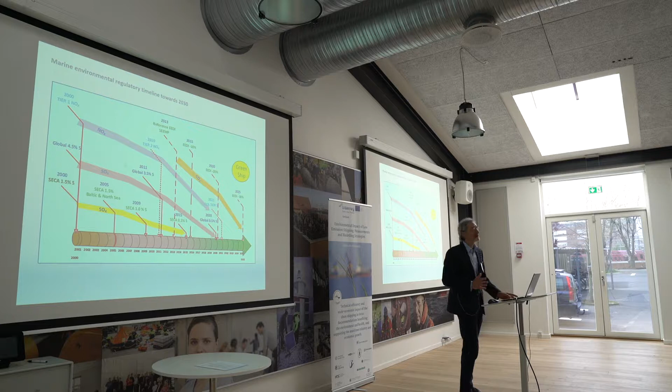And starting from this timeline of the environmental regulation, as everybody in this room probably knows, several programs started two decades ago, and now we are more or less coming to the end, and these programs are different. Each program is generally focused on a different gas component of the exhaust gases. And of course, these specific aspects of the programs affect not only the money which is going to be invested for such purposes, but also the ships themselves.

And now we are at quite an important point. Here we are close to the new regulations. Everybody knows about the sulfur cap, but in the shadow, we also have the next phase of the EEDI, which was already mentioned by Juka in the first presentation. And finally, we also have in 2021 the Tier 3 program for nitrogen oxides compliance.

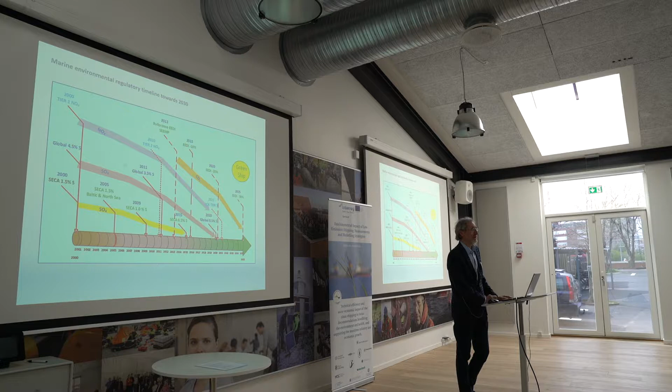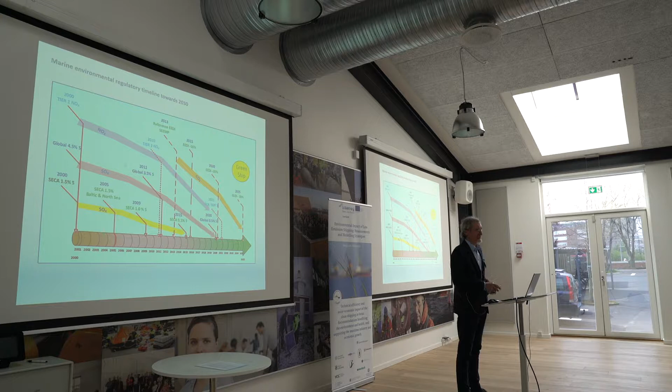Fortunately, this program regarding nitrogen oxides will be valid only for new buildings, not for all ships. And also, the CO2 programs will be generally focused on new buildings. And if we try to summarize what kind of possibilities we have to be compliant with the ECA regulations, generally, as in the title of my presentation, we divided this approach for emission control in two ways.

One is the primary, very simple one. You can remove the sulfur from the fuel and use low sulfur fuels as the primary source of energy. And the second one is more complicated, more costly for the engines. These are the scrubbers. The name scrubber unfortunately doesn't give the full picture of the system. Generally, the proper name is exhaust gas cleaning system, which will also be used later in my presentation.

That is the part which is quite important, and we know that we have different scrubbers, and not all of them are in use. For example, dry scrubbers haven't succeeded so far. We are waiting. The scientists and researchers are still trying to find the proper solution regarding this dry system.

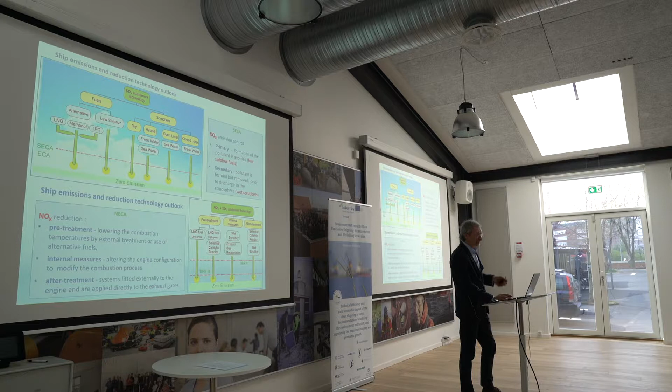Regarding the exhaust gas cleaning system, IMO predicted in 2016, in the data and estimation published in the reports, that in 2019, exactly this year, the number of scrubbers fitted on board ships would be 7% of this figure, 24,000 ships. Apparently, we found that at the moment nearly half of the ships are equipped with scrubbers, including the new buildings contracted for this year.

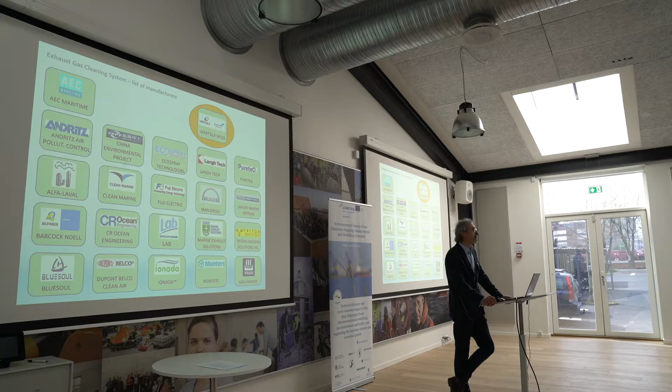So far there are more than 40 such system makers. There is not even enough space here to list all these scrubber makers. We also know that many scrubber makers have not been able to install any scrubber on board a ship. And we know that Wärtsilä is at the moment the primary and most important scrubber provider, and their system is one of the best at the moment. I'm not talking about the prices, I'm only trying to assess the technical matters

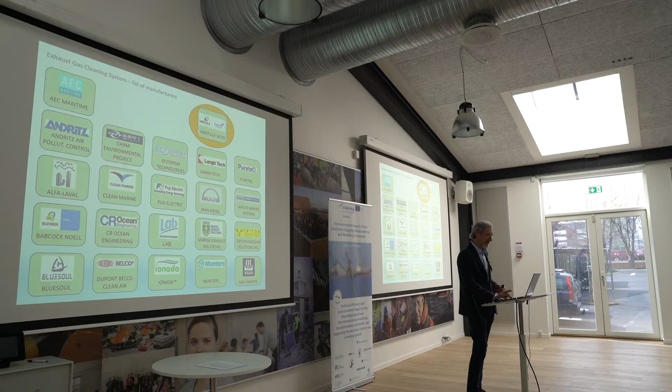related to such a system. The requirements for the scrubbers are quite simple, because one relates to the exhaust gas and the other to the wash water. But regarding the wash water, we have to be sure that we are talking about the wash water coming out from the scrubber. It depends on the mode of operation.

Generally, as Johan told us, there is this relation as a concentration of two components, sulfur dioxide and the CO2 percentage concentration. This is flexible and dependent on the value of the equivalent sulfur content in the fuel. That means if we need to be compliant with the new limit, this value will be bigger than we have listed here.

The other area is more important, I think, because it gives us certainty about what kind of water is coming out from the scrubber. So far we know that ship owners have generally opted for the open loop scrubber, which means all the water inside the scrubber comes out from the scrubber. Even if a certain amount of the water is cleaned, it is certainly not even 90%. Usually only a few percent of the water is cleaned.

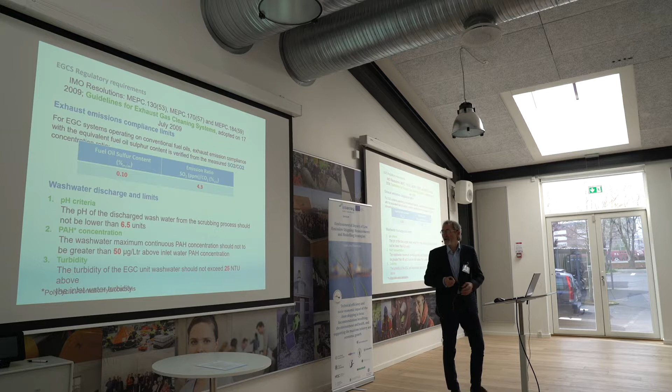Finally, there are two ways of approval for such a system, and there is a big difference between the two schemes. So far, we know that mostly the scrubber makers have used scheme B. The differences between the two schemes are quite important. In scheme A, it is necessary to build the system in the factory, provide all the necessary certification checks and certification run, and later install the system on board the ship and do this procedure once again.

The other one, much easier to do and already in use, is the scheme where only the monitoring system is tested and certified. The approval is generally given for the whole system, but only the monitoring system is certified. Why are such approval differences important? Because later on, if we have a system on board the ship which was not tested before, we could expect some problems.

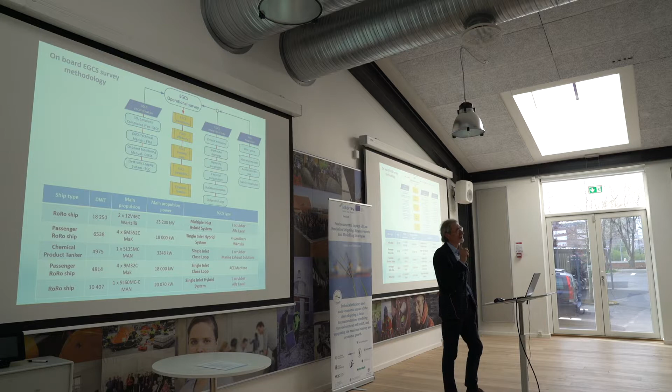And we focused on the most important issues like efficiency of the scrubber, which is of course quite important. Later on, we recognized also a very important issue like the consumption of the energy, which in contrary will increase the efficiency of the ships if we are talking about the operational indicator, not the design index, but the operational indicator, which is already also included in this convention.

And finally, we also tried to assess what is the necessity to use sodium hydroxide for the treatment if the ship is running in the closed-loop system. And not to mention the sludge discharge. All these components are very important because they create the additional cost which is necessary to provide for service of such a system on board the ship.

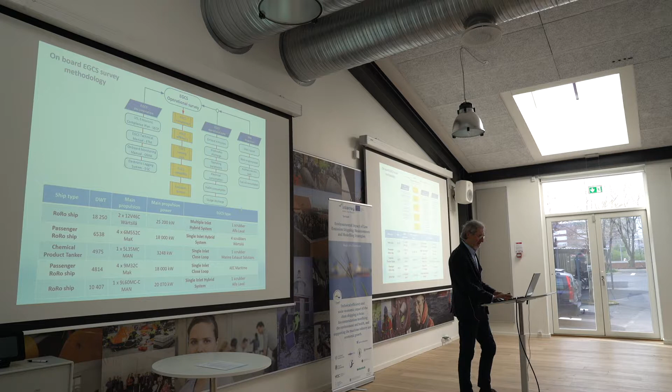And we know that during the ship operation, there are different modes of ship operation. And generally, we focused on ships primarily running at full load. And even if we have a hybrid scrubber, the ship owners use the open loop mode as much as possible; they only change the mode of operation when they come to the port.

There are even some ship operators who have a list of the countries where open loop operation is allowed inside the port. Maybe nobody can easily recognize that in some countries, mostly in Europe, the scrubber is allowed as an active system in port operation. There are two countries in Europe, probably Belgium and Germany, where the scrubber is not allowed. And I know from the ship they have in the engine room the list of the countries where they can change the operation of the scrubber before entering into the port.

And as you can see, we found the ships, so-called frequent flyers, between two ports, and they switch the scrubber from one mode to another one, and that is the relation where they use the different modes of operation. And we found generally the scrubber efficiency quite reasonable regarding the labels.

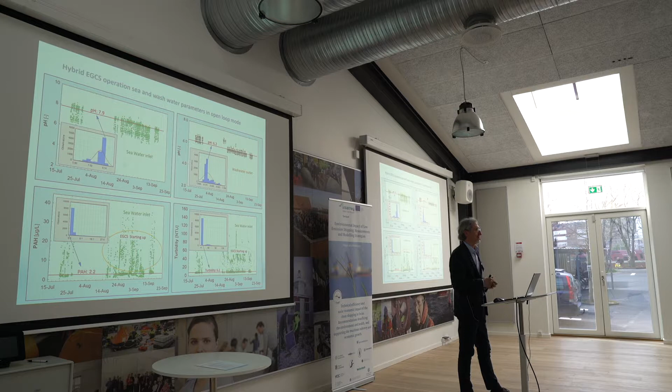For that purpose, I have marked the places where the scrubber was started, and even though it is difficult to believe, we have some disturbances on the inlet water, which means the system is very sensitive for this kind of measurement, and it shows instability. But anyhow, generally, all the parameters are okay, because I am showing you parameters which generally do not exist in the log created for such a system for the inspections. And finally, a very important issue, that is energy consumption.

Generally, you probably know that engine makers and system makers distribute information that the energy consumption is more or less 2% of the maximum nominal power of the main engine, or the engines used for the scrubber design.

And we found quite different figures, but our approach is more accurate. On board we recognize each piece of equipment. For example, the equipment shown here, and we exactly tested what is the working consumption in working conditions. Not always is this value strongly related to the engine load, because it's a quite different system, generally driven by electrical motors, which include all these variables related rather to the pumps, the ventilators, or other systems driven by these electrical motors.

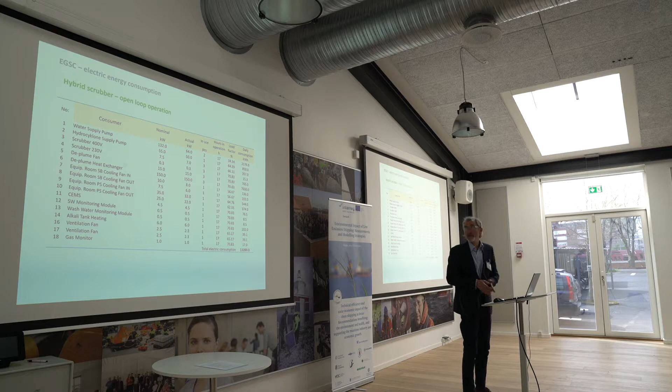Which means our approach is a bit different, because we are trying to assess the electrical load regarding the service load of the engine. These figures shown here are made for this specific ship, when this hybrid scrubber was operated in open loop mode. The same scrubber gives quite different figures if closed loop operation was used.

Basically, not only due to differences in the parts which we have on the list, but generally by the operational period. That explains why we have the different values.

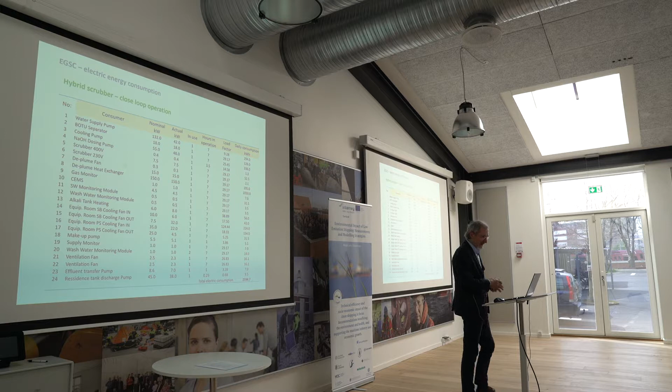One more example, from a different ship, where we tested the relation between the engine load and the consumption of the scrubber system. We found that for such a system there is no difference - you see we've got all the values which are generally the same. It doesn't matter if the engine load was very high or very low at the moment.

What is important - just take a look - the scrubber system gives quite an important increase of the load if we look at what is actually produced for this load. This is more or less nearly 30% of the total load in the electrical net for such a system in operation. And also important, this was the ship where we had closed loop operation all the time.

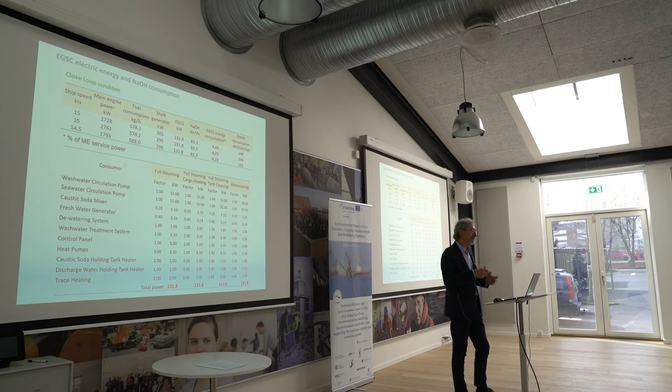There are some ships like this, where just take a look how incredibly high the consumption of the sodium hydroxide solution is. That gives you the impression of how important, and how high the cost, for such a seemingly simple operation could be.

Finally, I will change our attention to another solution, the LNG. For that purpose, we also recognized the amount of ships currently fueled by this kind of fuel.

But anyhow, we see the main problems for LNG as a main source of energy: two issues. One is, of course, the engine itself, and the other is gas storage. That is at the moment the biggest obstacle that we can recognize for such vessels.

Going to the ship design and ship concepts, we have, in contrast to diesel engines, quite different engines as potentially can be used on board ships.

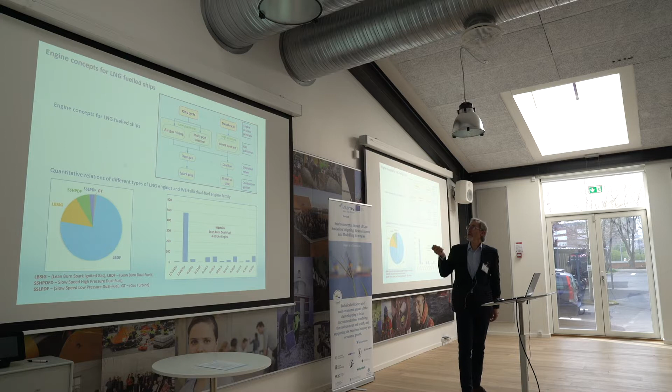Just take a look. If we look at the principle of operation, then we have two kinds of engine. One working more or less similarly to the diesel process, the diesel operation, and another that is the Otto cycle, more related to the engines we have in our cars, where we have combustion initiated by a spark plug. That is more or less the same.

But there are also other differences which are more important regarding the drawbacks already known and already mentioned - the so-called methane slip - which I'm going to show you later in the measurement results.

We also have quite different systems for gas admission to the cylinder. Only one engine maker has decided to choose, I think, the most sophisticated system, the MAN system, where they inject the gas exactly like conventional fuel directly into the combustion chamber.

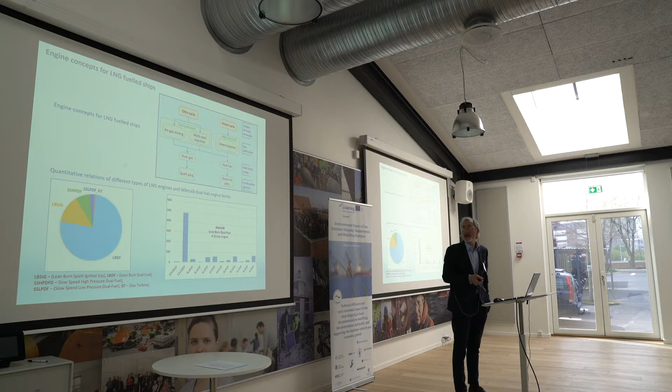The other ones use only a mixture which is prepared at the inlet to the engine - that is the air-gas mixing system. And the other one, very common, I think at the moment the most popular, is where we have multiple port injections to the inlet channel of the engine.

Finally, you can say we have two options: dual fuel engines, where we can use even heavy fuel oil or diesel oil instead of the LNG, and of course the LNG itself. And finally, we also have only the LNG engines. All kinds of these engines now we can meet on board the ship.

But just take a look. We generally have one engine maker, that is Wärtsilä. This engine maker provides, I would say, 90% of the engines which we have on board the ship, and specifically one family is very popular. Just take a look, this engine is mostly on these LNG carriers, and for that purpose we have chosen these engines for the survey as well.

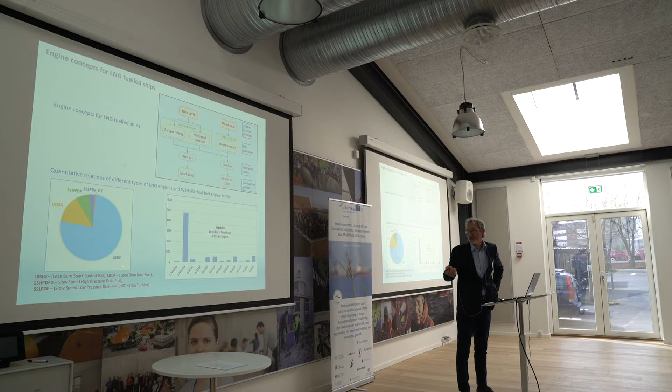As you see, there is the engine developed with this abbreviation - that is the Wärtsilä dual fuel engines. And it is quite important to understand what this lean operation means. I will give you some explanation.

Generally, most engines are operated very close to the stoichiometric ratio between air and fuel, close to 1. Our car engines, for example, are slightly even below 1. Generally all the engines we have on board as conventional engines operate with a ratio close to 1.2, but the Wärtsilä dual fuel engines are close to 2, exactly 1.95 - that is exactly the range designed for this kind of engine.

As an effect, we get very low concentration of nitrogen oxide, and of course the efficiency of the engine is very high. But the operation is very limited due to two negative aspects of this operation.

One is misfiring, and it happens very frequently - then the engine has to be stopped immediately by the safety system. And another one, which is more important, is detonation, also known as knocking.

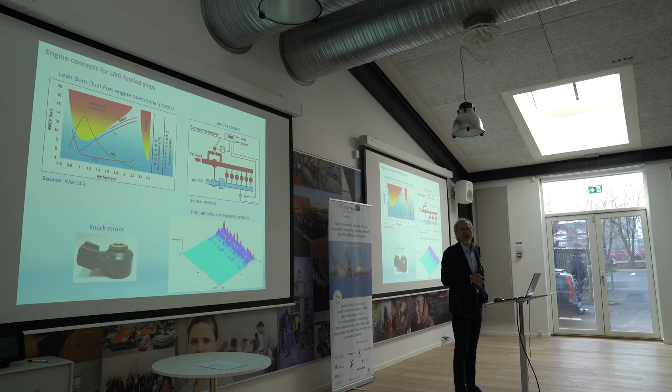...are equal to the knock process, which sometimes happens for a very short period, but is quite important to recognize. For that purpose, Wärtsilä has equipped its engine with this knock sensor to provide proper and safe operation of the engine during normal service.

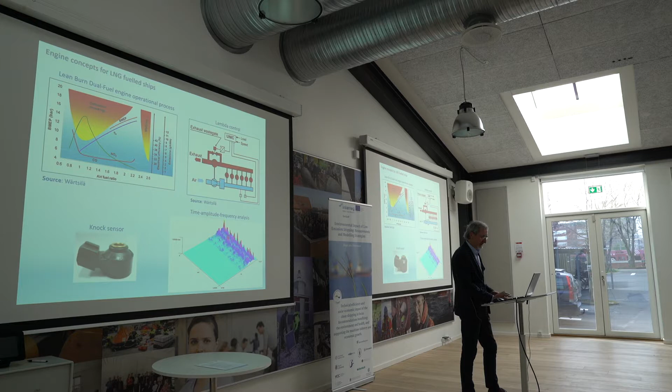Oops, something went wrong, I'm sorry. That was not my intention. I'm sorry, that is a mistake. I don't know why - probably it was something with this version of the presentation which I sent, because my intention was to show you a quite important issue.

That is quite important. Also, in the case of LNG as a fuel, we can suspect that some of the fuel gets out if it's unburned, which means that will increase the methane slip, which we already have as a normal negative side effect.

We were trying to find out the reason why, in service, we always have higher values of fuel consumption against the consumption that was stated during the test cycle in the factory. There shouldn't generally be any difference.

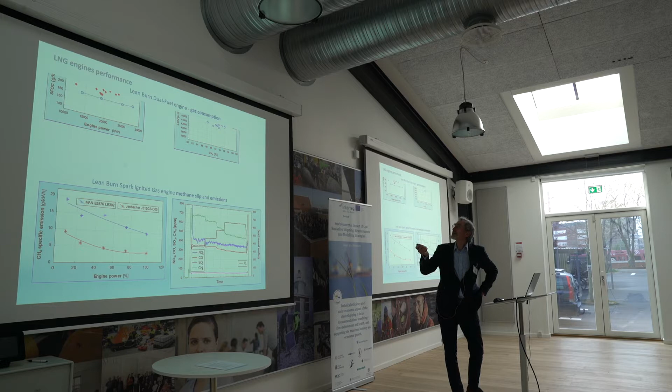Later on the other one will follow. So finally, that was the intention I have put here. The calorific value will change also according to the composition changes which we have in our fuel, and this trend was given in this diagram. I'm sorry, I can't show you more detail, but anyhow, everything will be in our report submitted to the website.

Of the project. And finally, regarding this methane slip, basically I can tell that no engine maker was excited if we tried to inform him that we are going to check the methane slip. And finally, we didn't get the permission from the main engine makers, so we have chosen some engines and we measured this methane slip. And just take a look what a terrible value we've got.

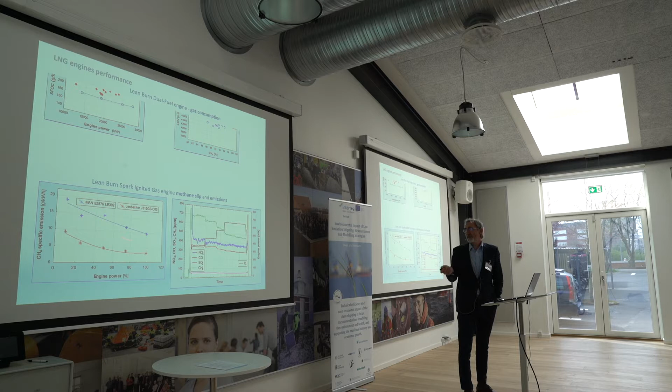And there is the exemplary concentration measurement which was done on this kind of engine. And just take a look, the nitrogen oxide emission, because these are lean burn engines, is really very low. Yes, that should be stated quite clearly. But anyhow, much higher concentration of methane we found.

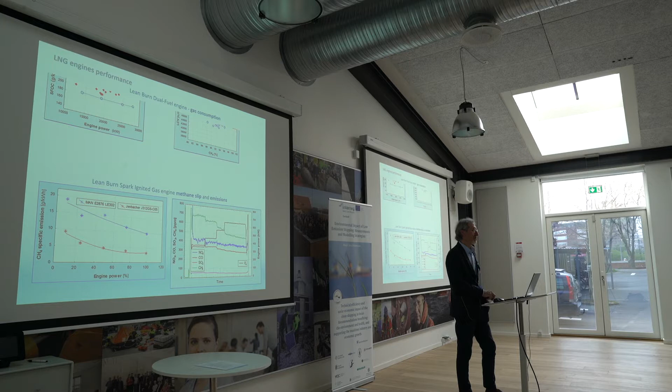Then later on, when we calculated these emissions to the methane slip, we've got this diagram for this engine which we have. Yes, it shows that it should be our concern at the moment, if we try to assess what is the real methane slip from the LNG engines.

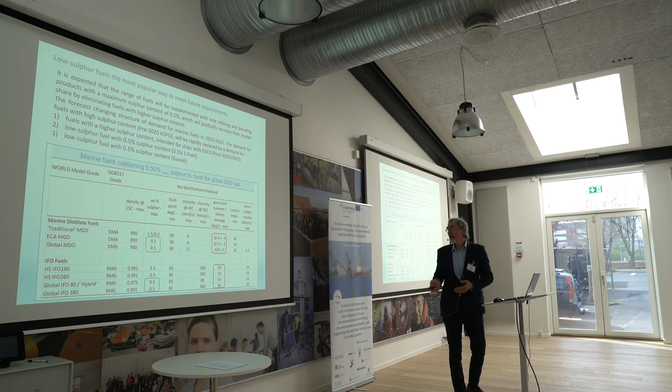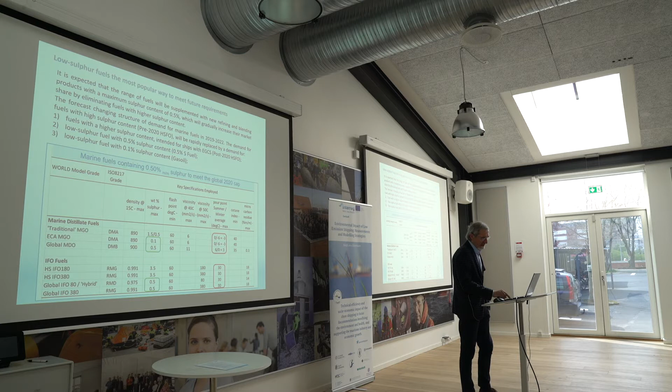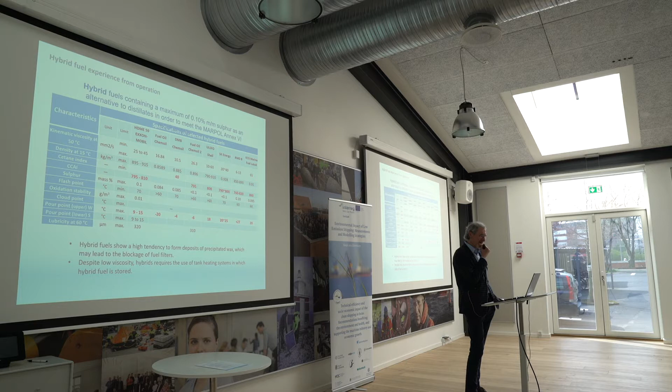And also I have marked quite important parameters of the fuel, which is important due to maintenance in our ship's system while we keep it in the storage tanks, and later on when the fuel is cleaned and transferred. And also when SECA was established in 2015, some refineries have proposed new fuels, so-called hybrid fuels.

And we collected all the different fuels, and also we have made some measurements on board where this fuel was in use. And I have marked intentionally two parameters which are extremely important for this operation and for the use on board. One, and that is the cetane index.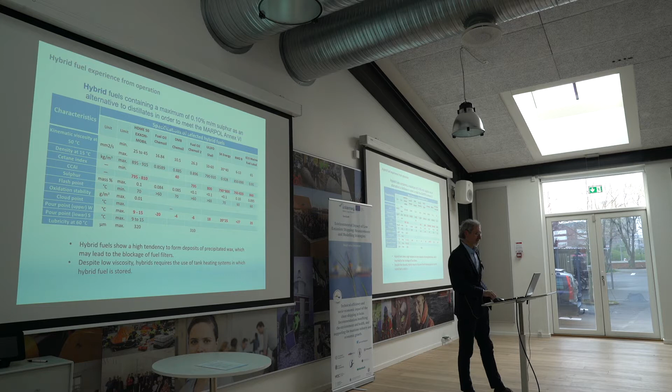As you see, in contrary to the normal diesel fuels, we don't have this cetane index stated. That is quite important if we try to assess if such kind of fuel would be fit for each engine. Instead of that, we use another factor given here, this calculated carbon aromaticity index, and we see that fortunately there is not so big a difference. According to this indicator, we can easily recognize which fuel is dangerous for our engines.

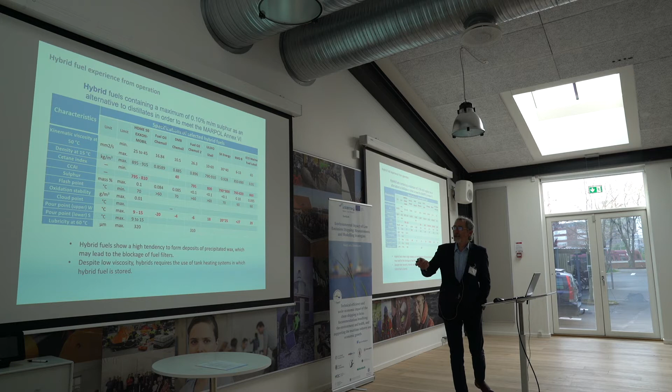And then our other, of course, parameter which is quite important, is the pour point. Because the pour point gives us, I would say, valuable value for us on how this fuel would be treated. Yes, and we know that this value generally creates some problems for the crew on board the ships.

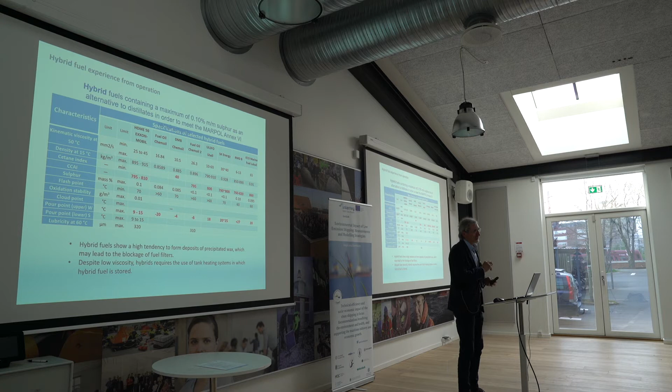And I can say that so far the hybrid fuels can be equally treated as the other fuels, but anyhow I would not advise this fuel for ships where they change fuel very frequently. We know that this fuel exhibits very high incompatibility with other fuels, which means that if there is an operator that operates all the time in the ECA area, this kind of fuel would be recommended for constant use. But if there is a ship which is leaving the SECA area later on, doing changes very frequently, it would be very hard to follow all the problems which we got.

And we took measurements on the ship which used all these fuels as a proposal, as an option for the SECA area. These fuels are listed here, and we found there is no problem generally for the engine itself to take all these fuels. Even so, we were surprised because the engine was optimized for the HFO. The HFO gives the best figures regarding consumption.

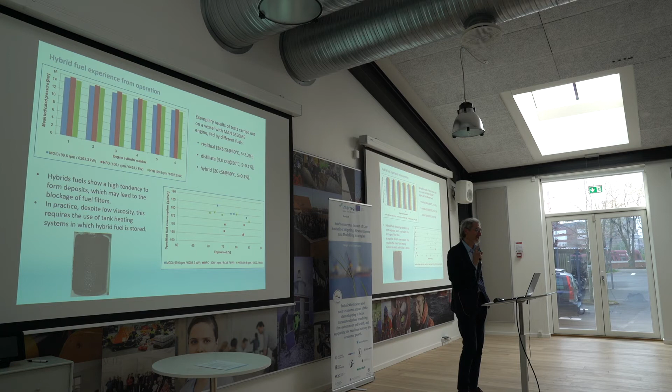You would believe that even if this fuel, the hybrid fuel and this distillate fuel, has generally the higher heating value, the consumption was a bit higher than this HFO. But that is explained generally by the optimization of the engine for such fuel.

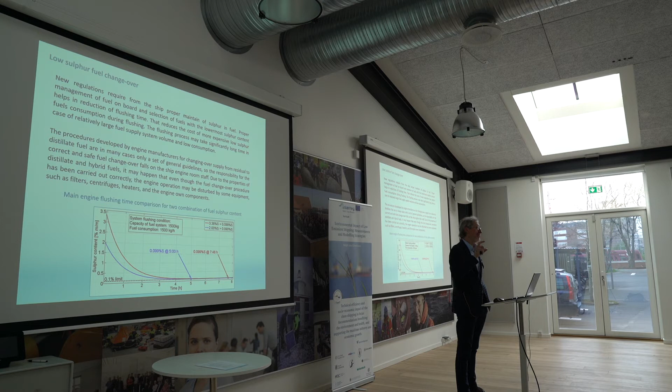And finally, we found also that the changeover procedure should be individually calculated on board the ship, individually for each engine and even for each fuel. Even if we know there are several calculators for this kind of operation, anyhow we found that it's necessary to provide more precise calculation regarding the current and actual fuel consumption.

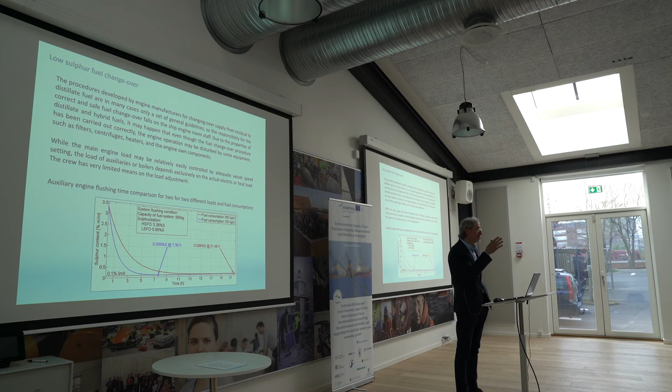And that is the example where we draw the changing from one fuel to another, and after the flushing period, you can recognize that it's necessary to do such calculation for each engine where the engine is going to assist the entrance to the SECA area. And it relates also to the auxiliary engines. Is it necessary to change the fuel? It is necessary to make the proper calculation separately for the auxiliary engine itself.

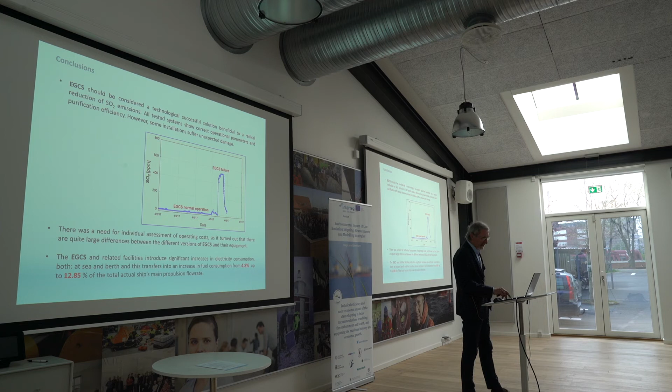The other conclusion is quite important here. We found the actual value expressed as a percentage of the service flow rate of the fuel or the load of the engine, it doesn't matter because they are more or less the same, from 4.8% up to 12.85%. It is a substantial amount of energy which is needed to run this system on board the ship.

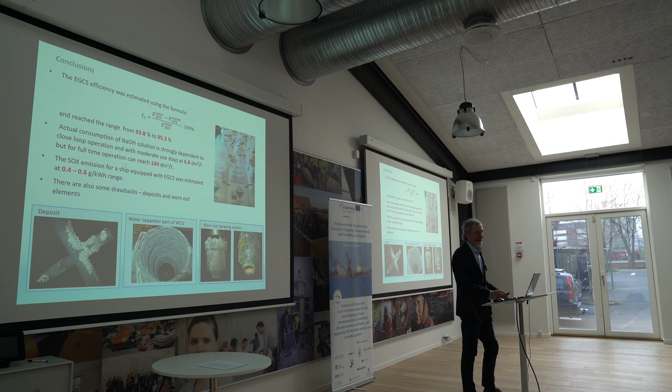And as a factor, we found the SOx emission factor for the ships which are equipped with the EGCS, which is given here. And finally, the negative side of this operation, which we found inside the scrubber. There are some deposits in the scrubber in different places, and some parts of the scrubbers are very sensitive. For example, the nozzles; there is the picture of a nozzle which was in service for 1 year. That is a very costly part. I would say several hundred euros each for the replacement.

And the next one is LNG. We know so far that LNG is not the best option for the ships at all, and we found that this unwanted effect, the methane slip, is still a very serious problem that should be solved. I don't know in which way, but anyhow, that is the engine maker's problem. And because we've got quite new designs of the engine, just take a look. There are reported some heavy damages which we have on board the ships, and there are examples of how this damage looks if it happens on board the ship. There are several accidents that happened on board ships.

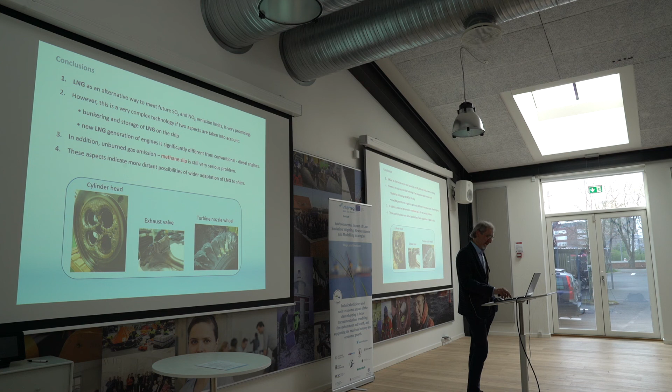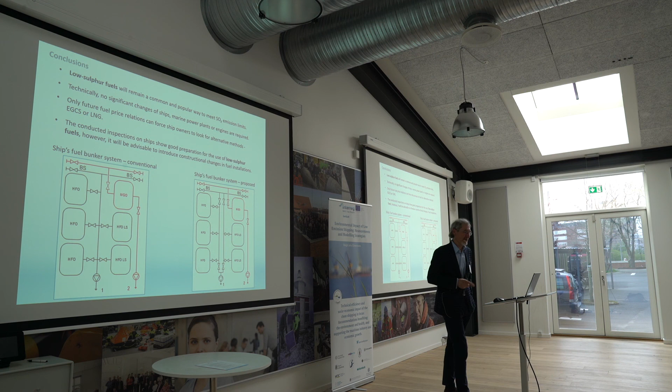And finally, I can tell that we expect that low sulfur fuels, which I have listed here, will remain the main options for the ship operators to meet the sulfur limit. But anyhow, we found that there is a necessity to make some changes in design, specifically in the systems. As an example, I can show you the system which is used for the bunkering of the fuel. According to our proposal, we advise the ship owners, if it's possible, a quite simple change: to introduce another pipeline only for the low sulfur fuel or for the high sulfur fuel if two kinds of fuel are going to be used.